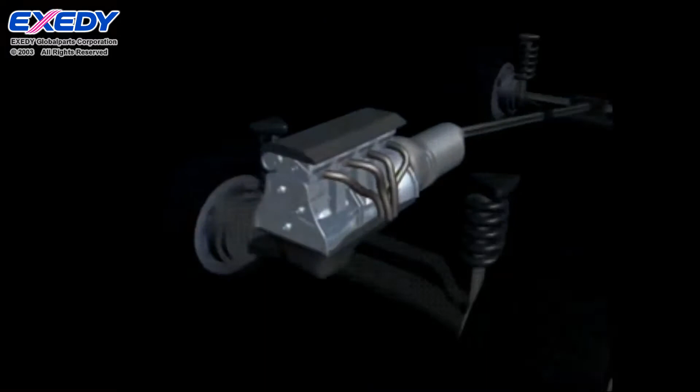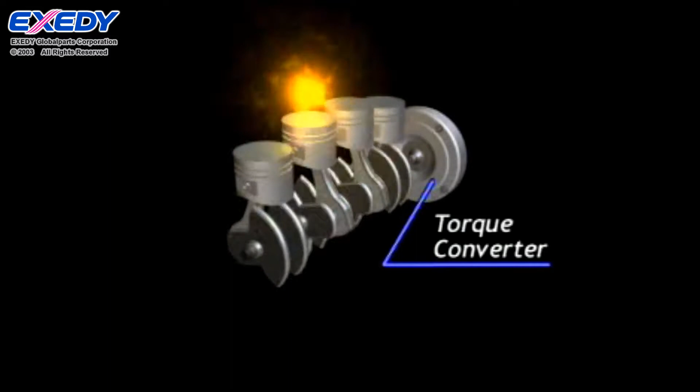Located between a car's engine and its transmission is a torque converter, which is connected to the engine through a drive plate. The torque converter is a crucial component of the drivetrain. It amplifies engine torque and transfers it to the automatic transmission.

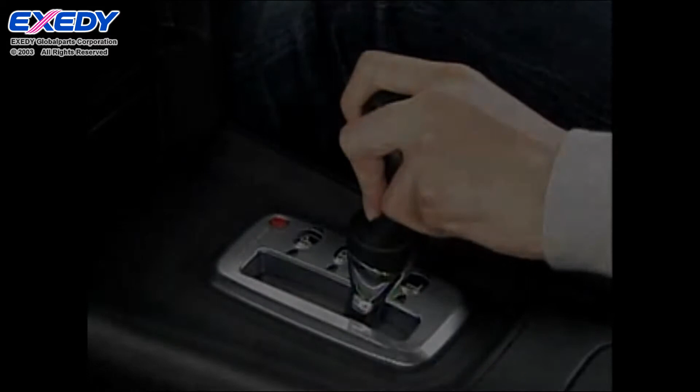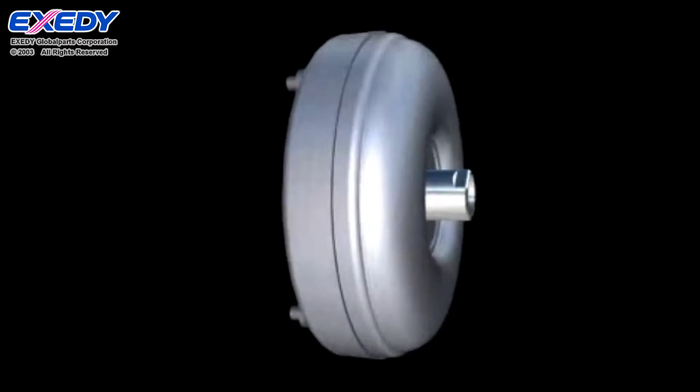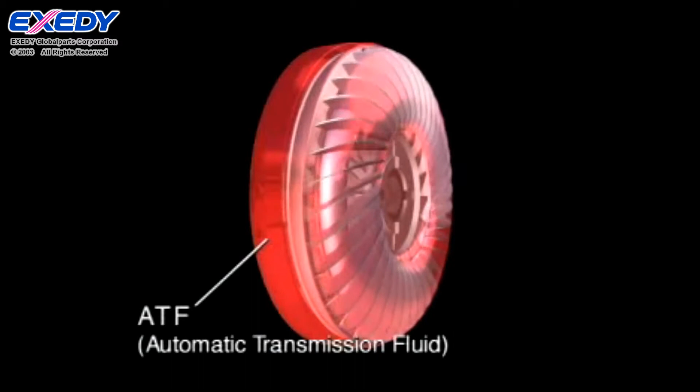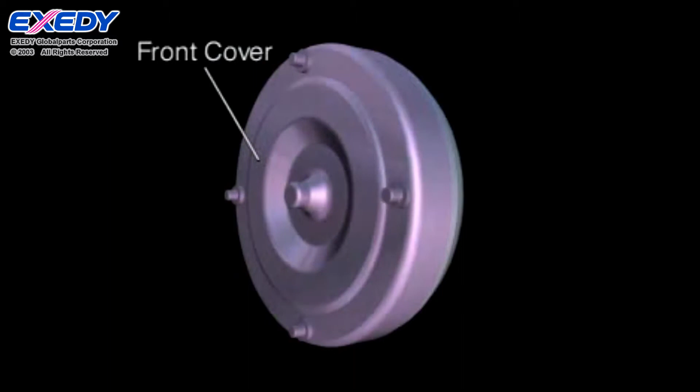A torque converter consists of 3 vaned wheels. The torque converter is filled with automatic transmission fluid from the transmission. Engine power is transmitted to the transmission via this oil. Power from the engine is first transmitted to the torque converter's front cover. Integrally connected to the front cover is a vaned wheel called an impeller, which the transmitted power causes to revolve.

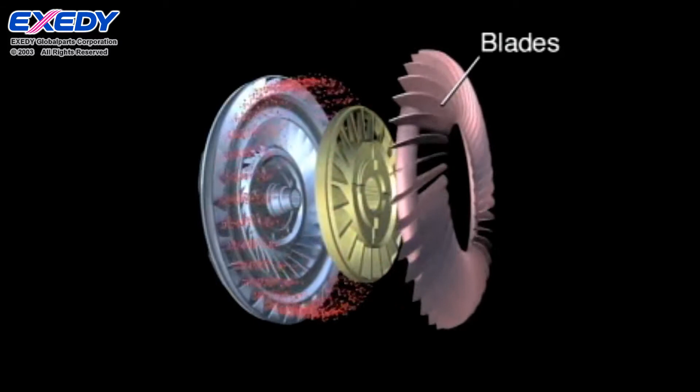The impeller blades make the oil revolve. The oil is pushed outward at high speed by the engine torque. This oil pushes against another vaned wheel called a turbine, making it revolve. Drive power is transmitted from the turbine through the input shaft to the transmission.

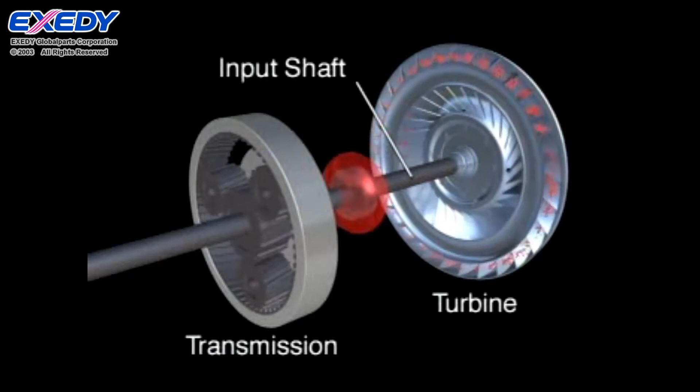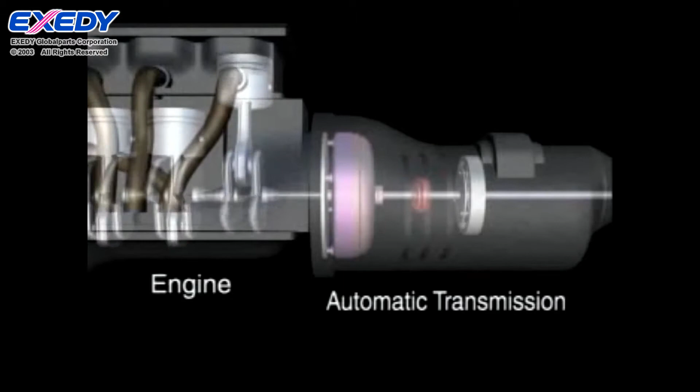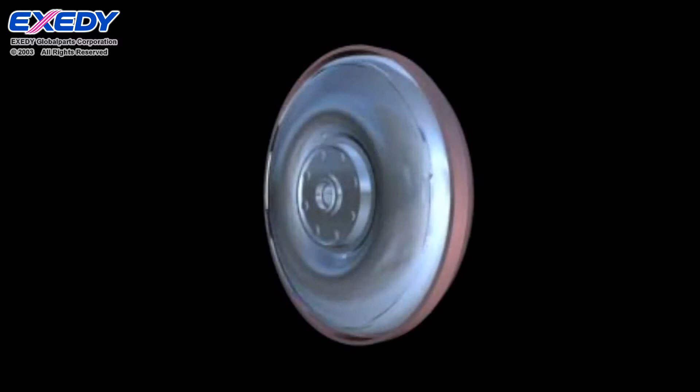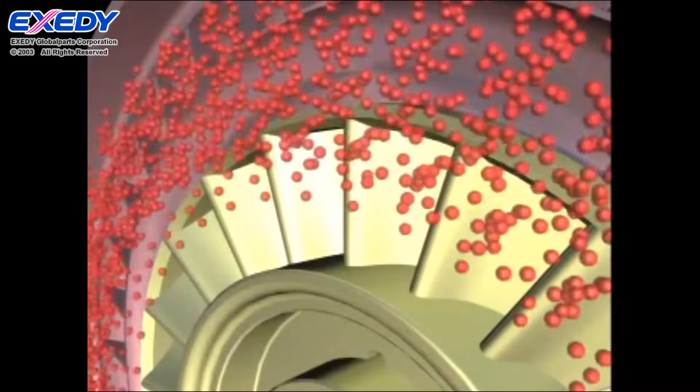Typically, this drive torque is not enough to briskly accelerate a vehicle from a complete stop. The solution to this is the addition of a component called a stator or reactor. The stator functions to smoothly return the oil from the turbine back to the impeller without any power loss. When the vehicle first starts moving, the oil flowing through the turbine next flows through the stator and is returned to the impeller flowing in the same rotational direction, amplifying the power used to turn the turbine.

As the vehicle accelerates and the speed of the turbine increases, the stator becomes a resistance that makes the oil flow less efficiently, dissipating power. For this reason, a one-way clutch is built into the stator. As the speed of the turbine increases, the stator revolves without creating any resistance.

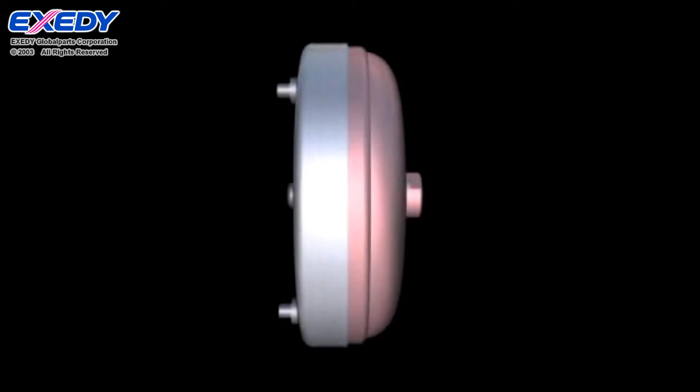Some transmission loss is unavoidable in a torque converter that uses oil to transmit drive power. To reduce loss, a damper-equipped lockup clutch is used to enable direct connection. The damper-equipped lockup clutch is installed between the front cover and the engine side of the turbine and moves in the axial direction in accordance with changes in oil pressure.

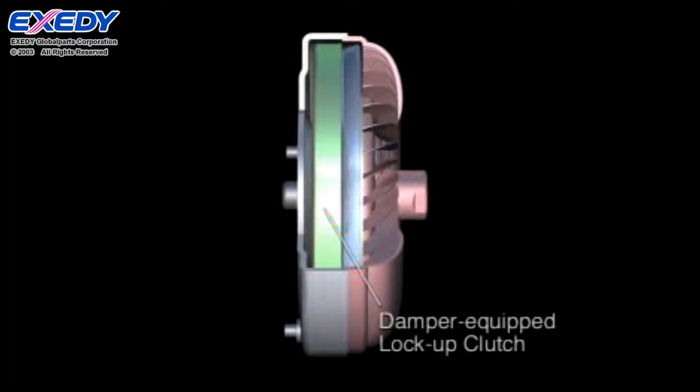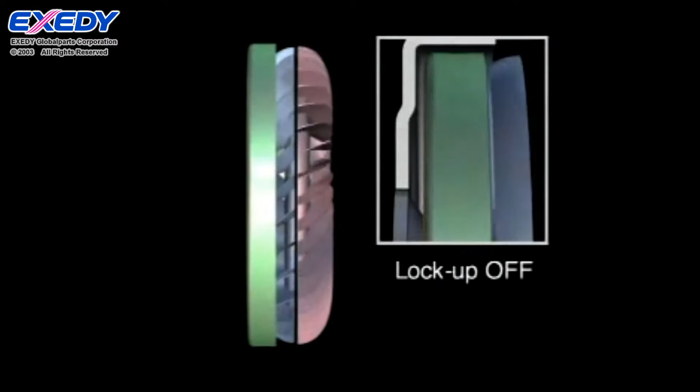A change in oil pressure presses the damper-equipped lockup clutch against the front cover. Through this action, the drive power transmitted to the front cover is directly transferred from the damper-equipped lockup clutch to the transmission via the turbine.

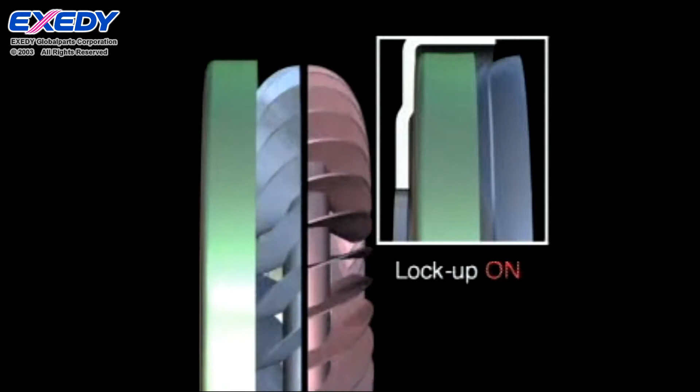But because the engine and transmission are directly connected, fluctuations in the engine's rotational speed are also transmitted to the transmission. This causes the drivetrain to generate vibration and resultant noise. A spring built into the damper-equipped lockup clutch absorbs the vibration so it is not transmitted to the transmission.

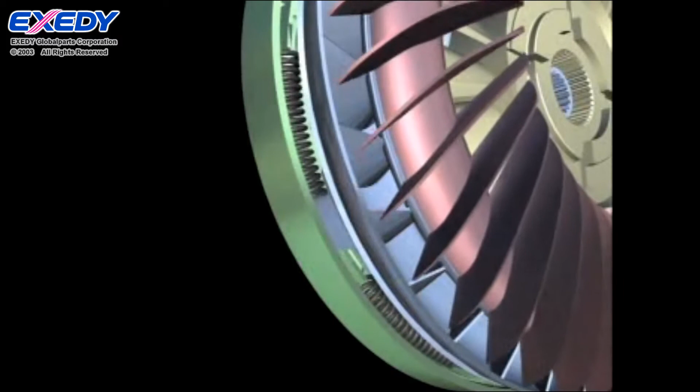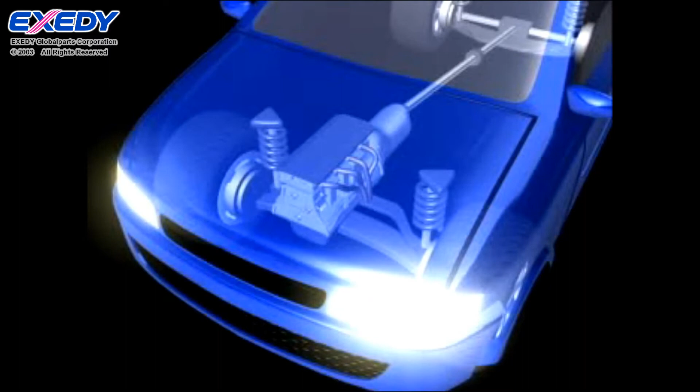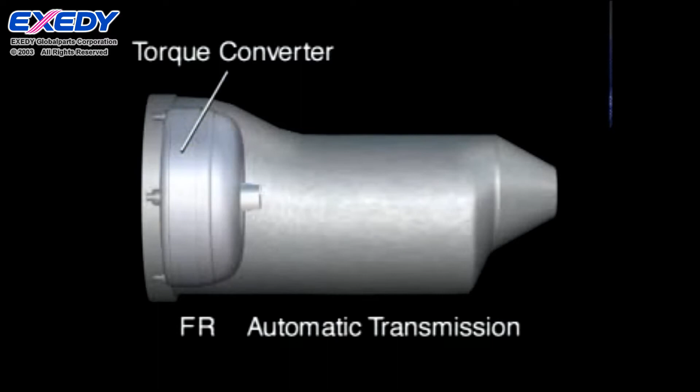Today, the growing number of front-engine, front-wheel drive vehicles which have a transversal powertrain layout has generated demand for elliptical-type torque converters because they take up less space in the axial direction. The recent trend toward 5- and 6-speed automatic transmissions has created a need for super-elliptical torque converters that take up even less axial space to allow more space for the transmission.

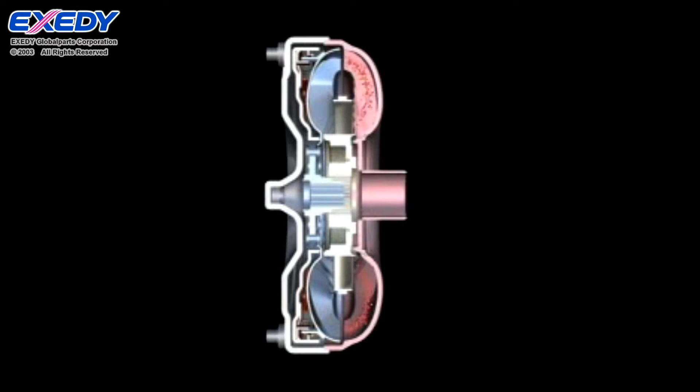This is a cross-section of a torque converter. This is where the oil revolves. Oil flows more easily when the torque converter is round. With an elliptical torque converter, the flow is not as smooth, reducing torque converter performance. Exedy is now developing a high-performance, compact elliptical torque converter that offers extremely smooth oil flow.

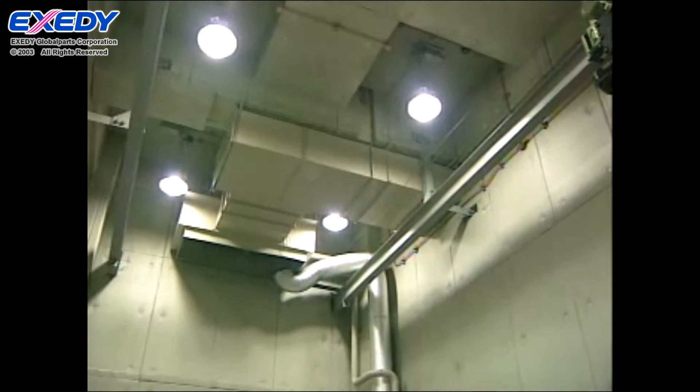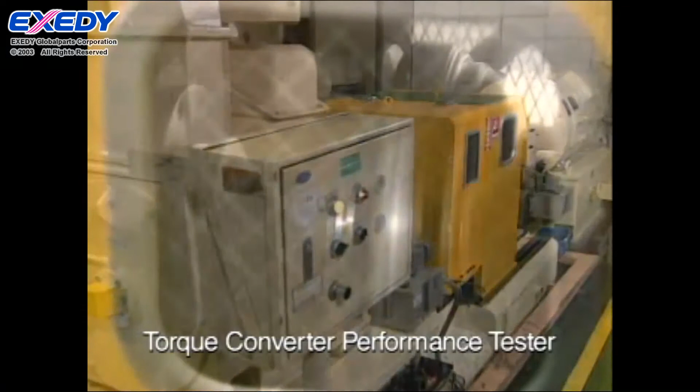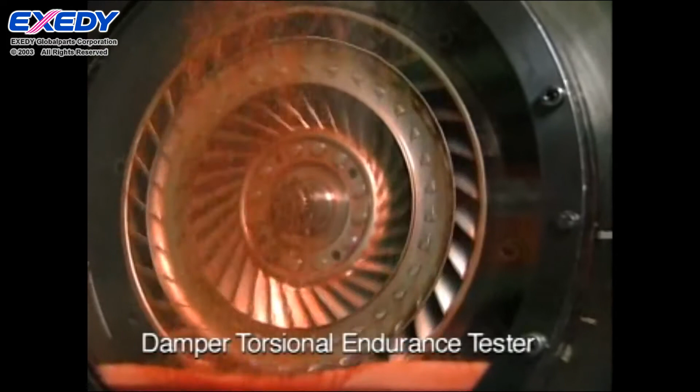Research is now underway to determine how to achieve smooth oil flow despite the difficulties presented by an elliptical shape. As a torque converter revolves at high speed and its blades are three-dimensional, it is extremely difficult to examine the oil flow inside. Extensive experimentation has provided Exedy with a wealth of data on the oil flow inside a torque converter.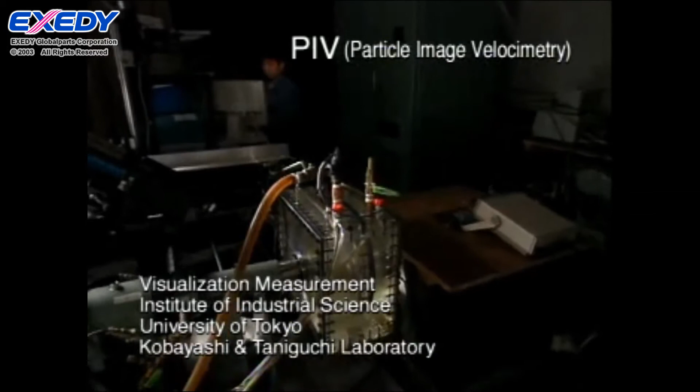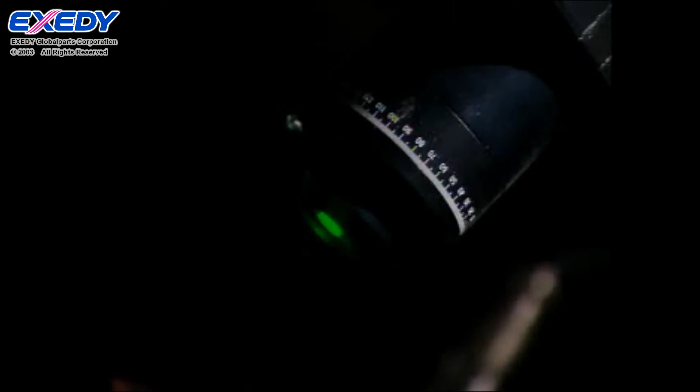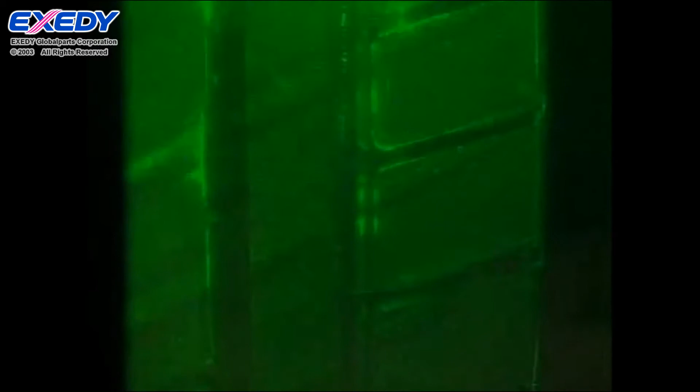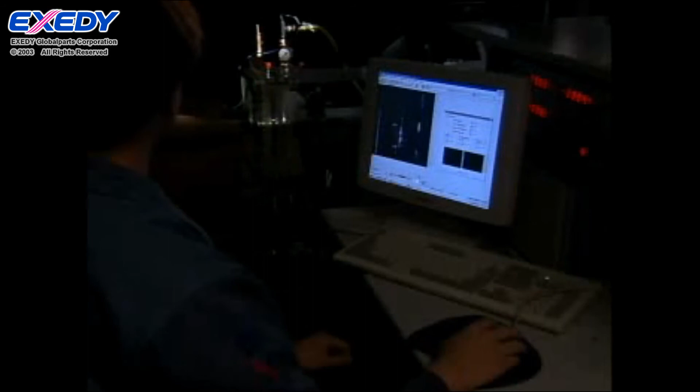We also utilize a method called PIV to measure the oil flow inside a torque converter. This method employs a transparent torque converter and special particles in the oil, which are illuminated by laser to visualize the oil flow. Previous experimental methods yielded only inferred values for oil flow. Visualization using the PIV method provides data that is much more precise.

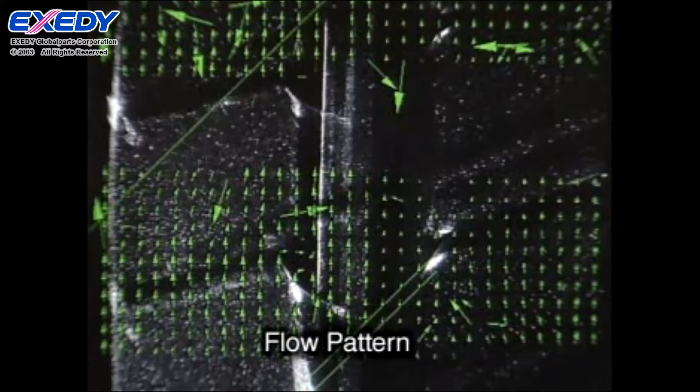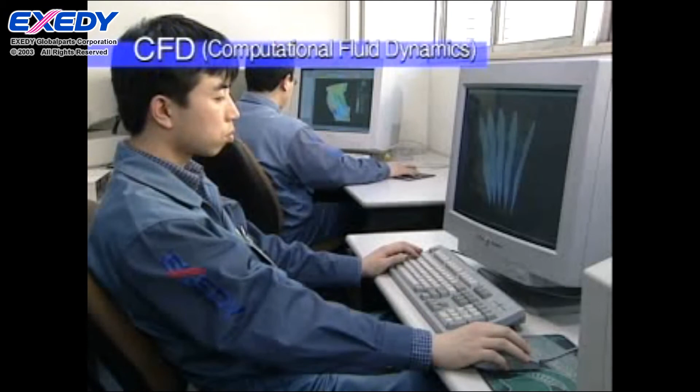Utilizing the huge volume of data obtained through this cutting-edge technology, together with advanced simulation technology, Exedy is able to develop high-efficiency, high-performance torque converters much more quickly. Computer programs that simulate fuel economy and acceleration performance enable Exedy to design converters that perfectly match a vehicle's requirements. Exedy is also utilizing these technologies to develop a very compact starting device consisting of a torque converter that incorporates a high-performance damper.

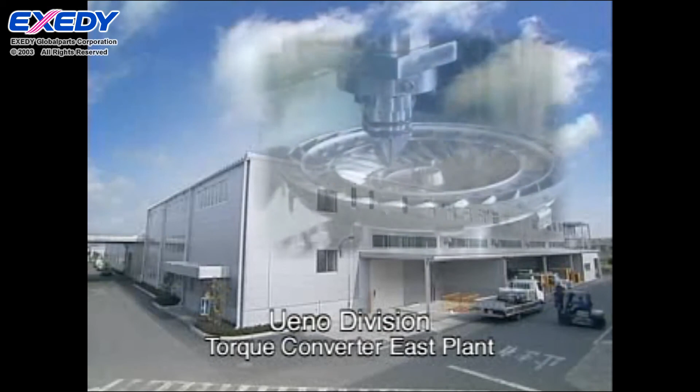Offering performance and quality to satisfy requirements around the world, Exedy will continue meeting the challenge as drivetrain specialists, powering the further evolution of the automobile and today's motorized society.